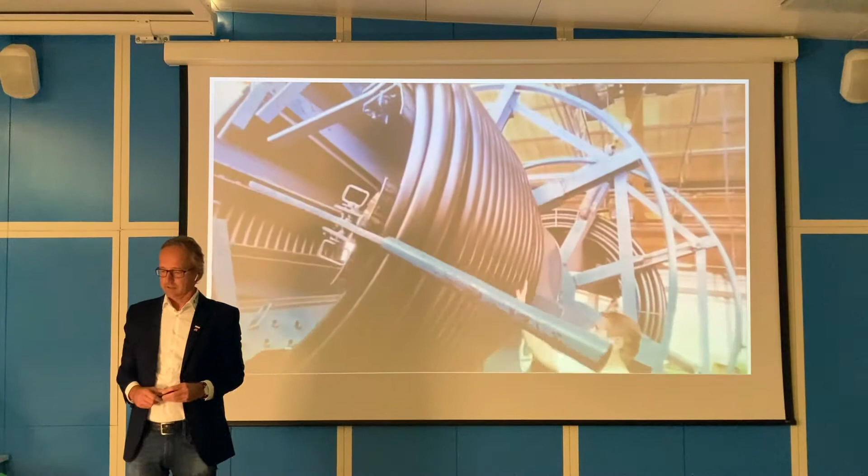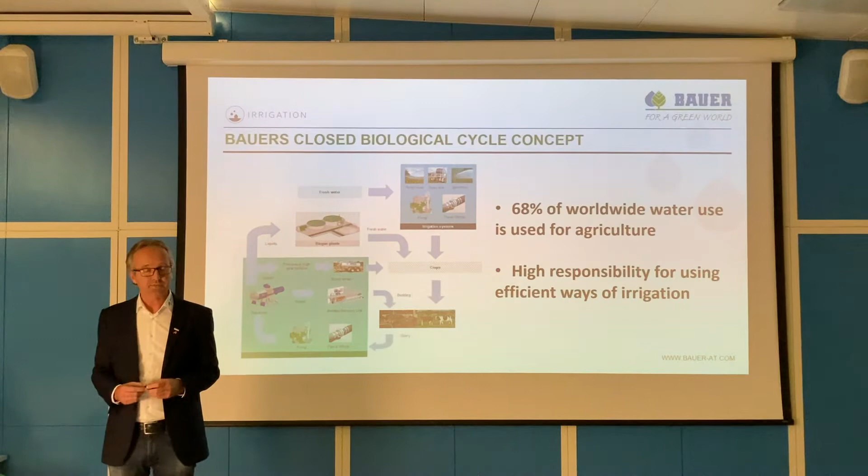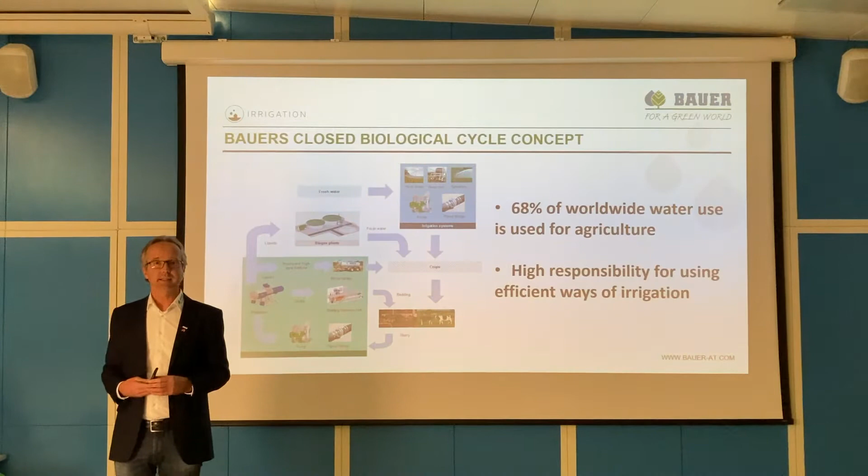Here you can see our closed biological cycle concept for BAUER. For us it's very important that all our products are as efficient as possible. The wastewater treatment equipment should handle the wastewater on livestock farms as well as industrial wastewater plants, and the irrigation equipment should reach highest irrigation efficiency and make sure the yield, in your case the corn, is perfect. You have a safety of your yield and you get perfect corn.

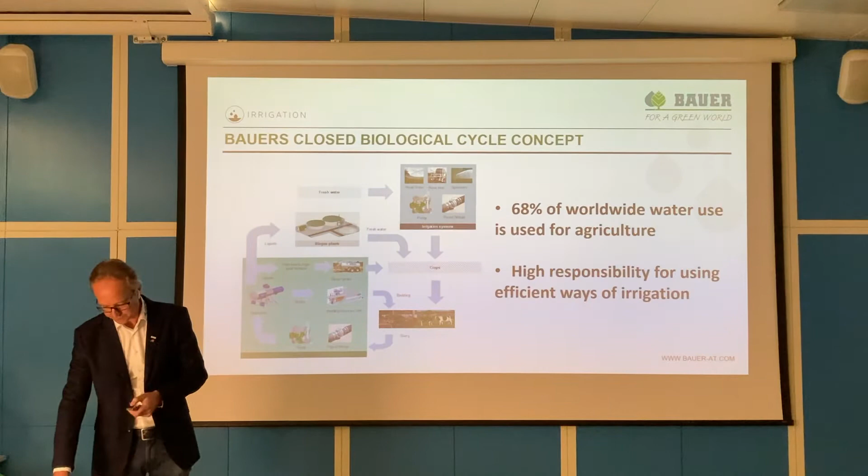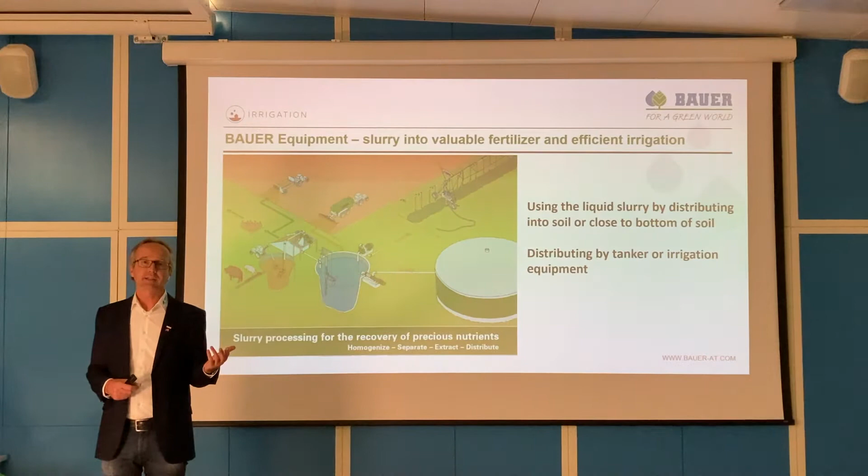In our wastewater treatment range, we have also a lot of products. We concentrate on separation, mixing and pumping technology. The separator divides the wastewater into a solid and a liquid part. The solid part can be used as an organic fertilizer or also as a bedding material. The liquid part can be distributed on the field, also on the cornfield, as a very valuable fertilizer.

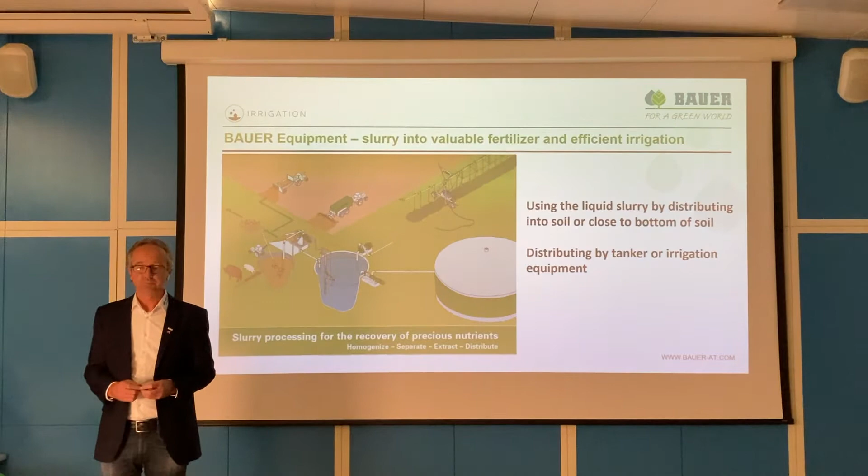We distribute the liquid of the slurry either with slurry tankers with very high technology distribution systems or also with irrigation equipment.

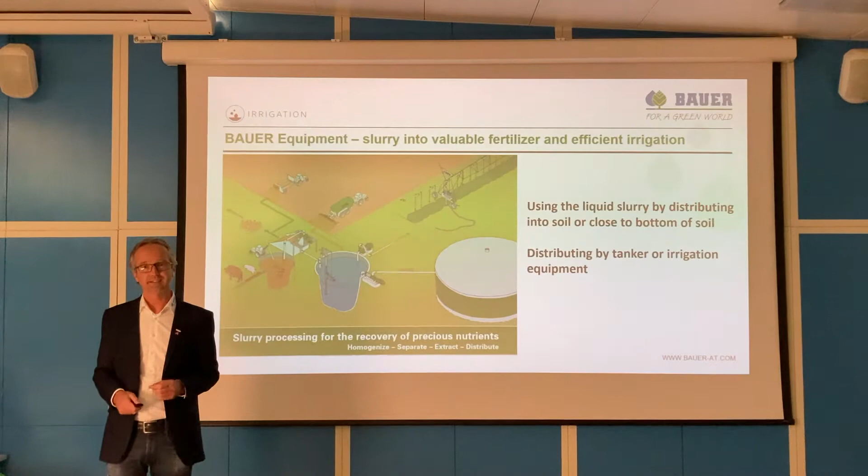The efficiency of different irrigation systems is a very important point, as the water which is available is getting less and less. At the same time we need to grow more crops, more vegetables in order to feed the higher growing population worldwide.

In the past and also until now, a lot of irrigation is done by flood irrigation. Flood irrigation is very inefficient. It has an efficiency of only 40–50%.

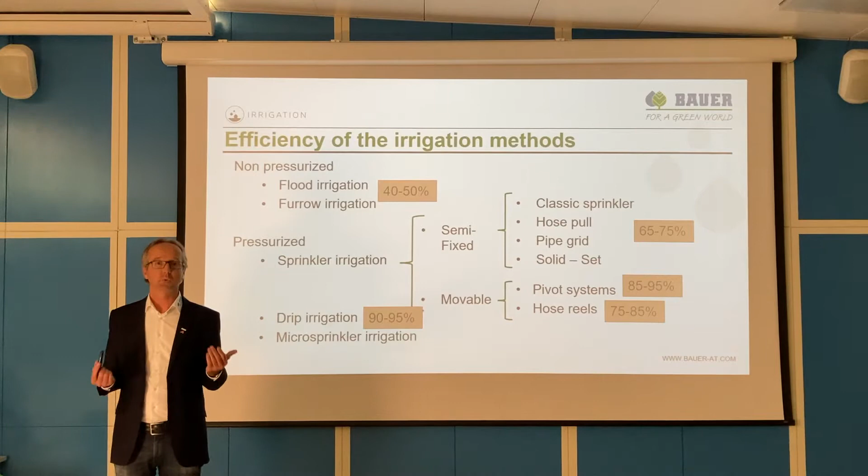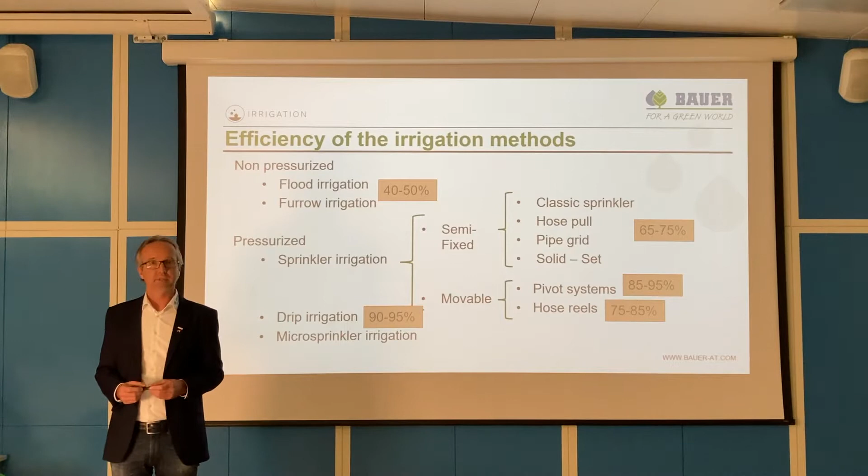From our company, the product range, we start with solid set sprinklers, with hose reel travelers, so-called RAINSTARs, and pivots or linear systems. Hose reel travelers can reach an efficiency of up to 85%, and pivot systems can reach an efficiency of 95%, which is very close to other highest efficient irrigation systems.

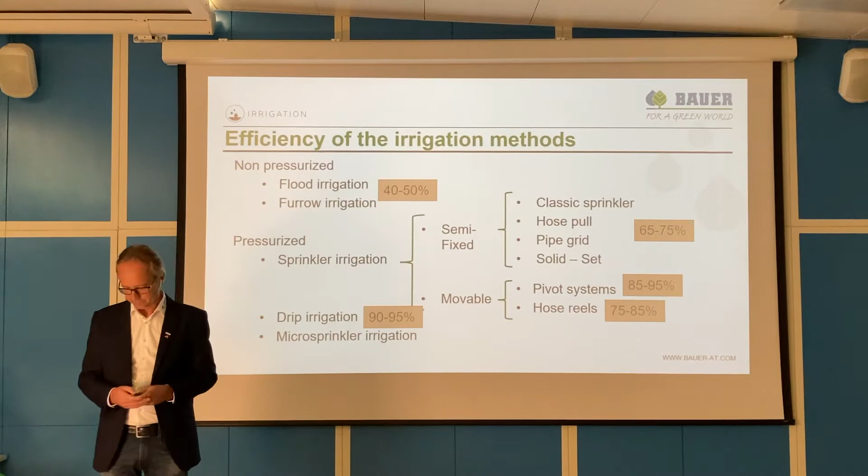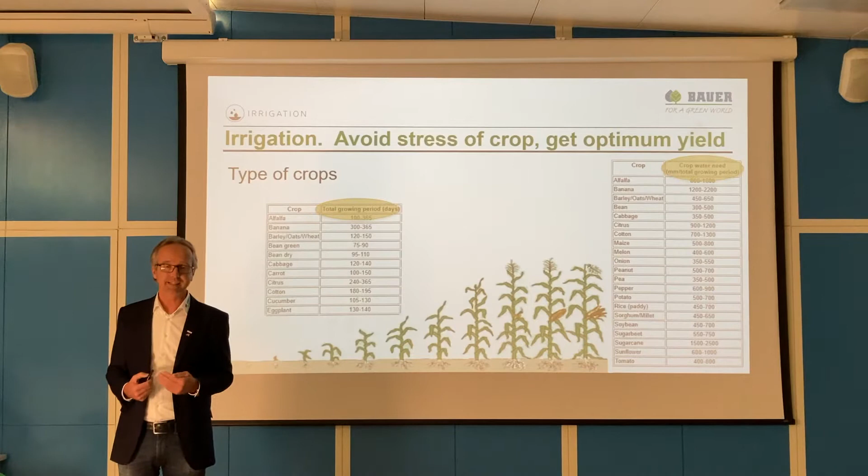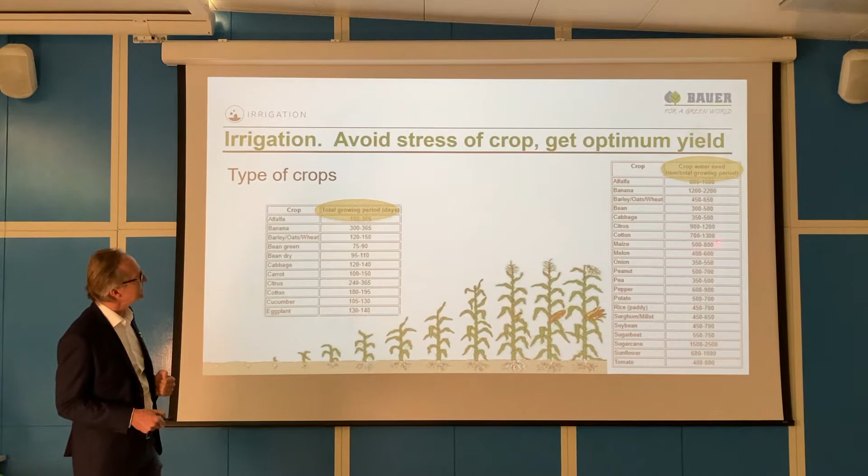For you as a crop grower, it's most important that the amount of water which the crop is needing from germination in the early growing stage until harvesting is always perfect. This only can be done with efficient irrigation systems. For corn, for example, the amount of water needed is 500–800 millimeter or liters per square meter in the whole growing period.

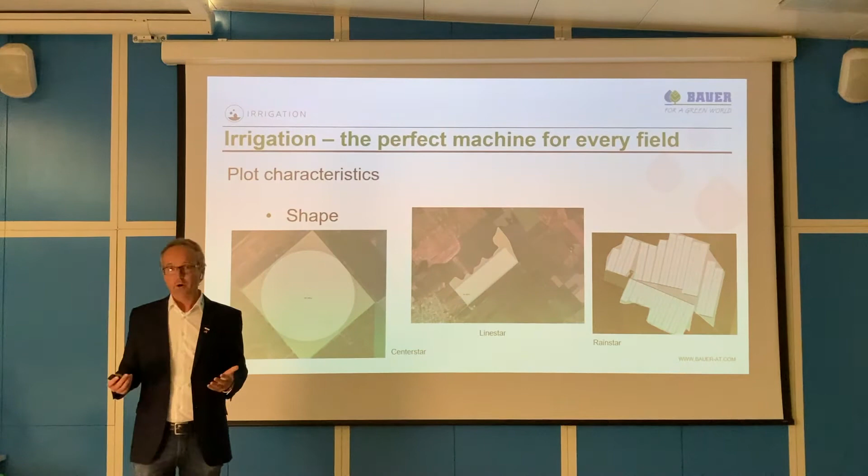Our irrigation equipment can match different sizes of fields and also different shapes of fields.

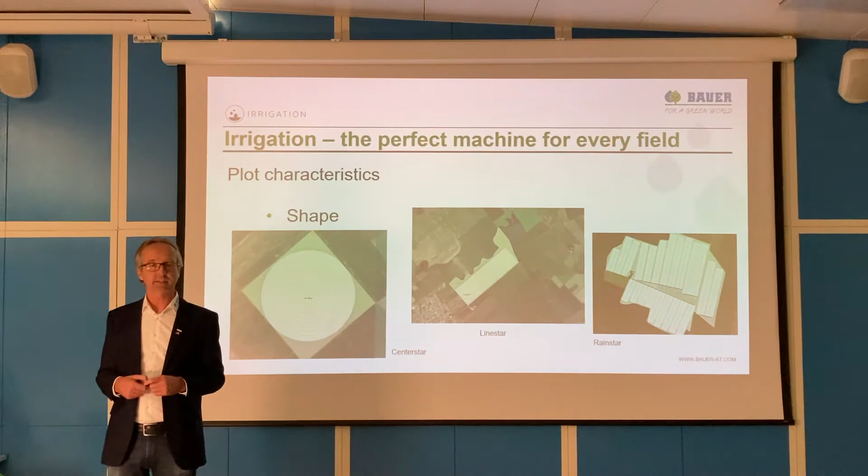In the left picture you can see a quadratic field. If the quadratic field is bigger than 15 hectares, a pivot would be the best choice for such kind of field. If the field is a rectangle field, a linear system is a very good choice. And for fields of 1, 2, up to 15 hectares and different shapes, the hose reel traveler, the RAINSTAR, would be the best choice.

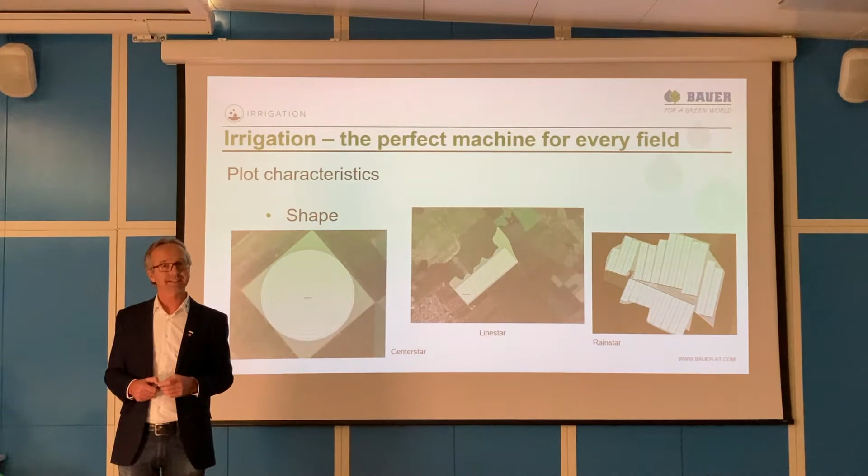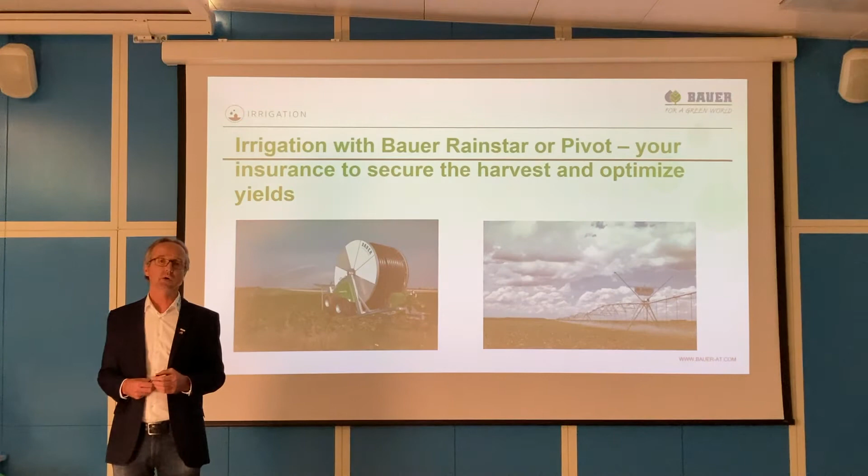On the left picture you can see a BAUER RAINSTAR irrigator. BAUER RAINSTAR irrigators are available in 3 sizes: BAUER RAINSTAR A2 or A3, then a T-series. T-series are available from 250 meter hose length up to around 400 meter hose length, or the very big machines, the RAINSTAR E-series, with hose lengths up to 700 meters.

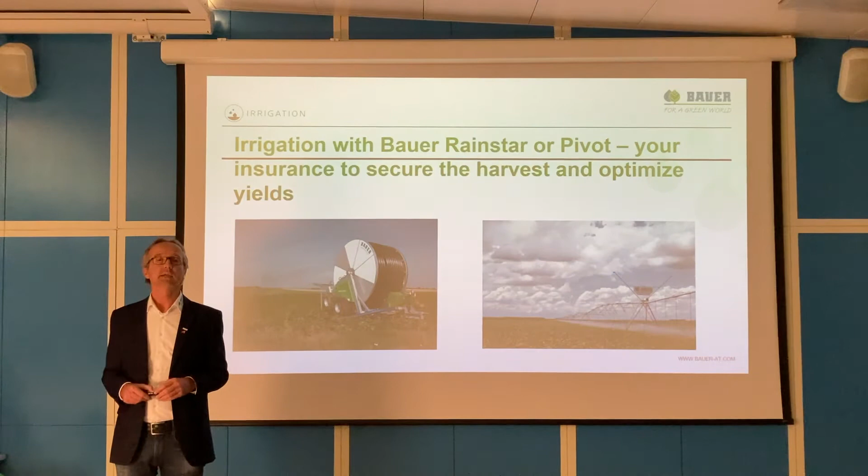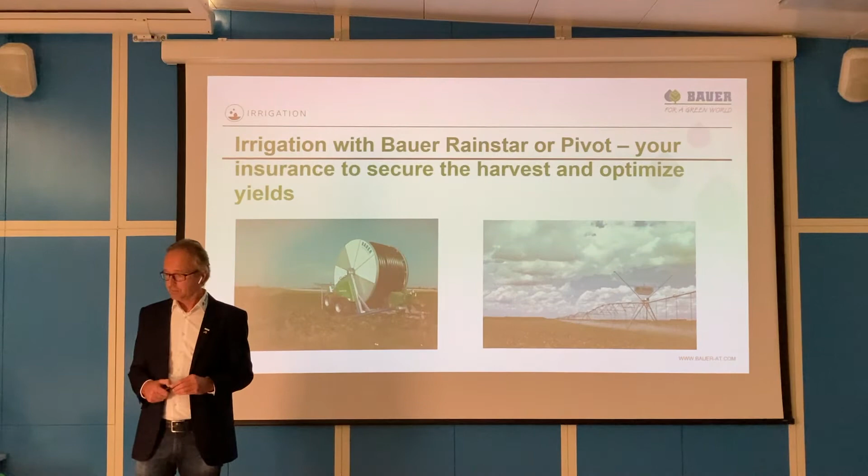On the right side you can see a BAUER pivot. BAUER pivots are worldwide in big use. BAUER pivots are used in around 80 countries all over the world, and BAUER pivots are irrigating all kinds of crops and also grassland. For example, in New Zealand, many dairy farmers are using the pivots for irrigating the grassland to feed the cows which are out on the grassland.

Now I would like to show you a video of the RAINSTAR and pivot, so you get an idea how the machines are installed and working on the field.

That's a very big BAUER pivot with a corner system, irrigating areas up to 400 hectares.

One machine can have up to 14 spans. This means a system length of around 600 meters.

The control of the machines is done with the so-called Smart Touch controller, with a 10-inch screen. The machine can also be equipped with VRI, which means variable rate irrigation, which I will explain a little bit later.

A corner arm has the advantage that the corners of the rectangle field can also be irrigated with a pivot. Here the corner arm is in operation, in use.

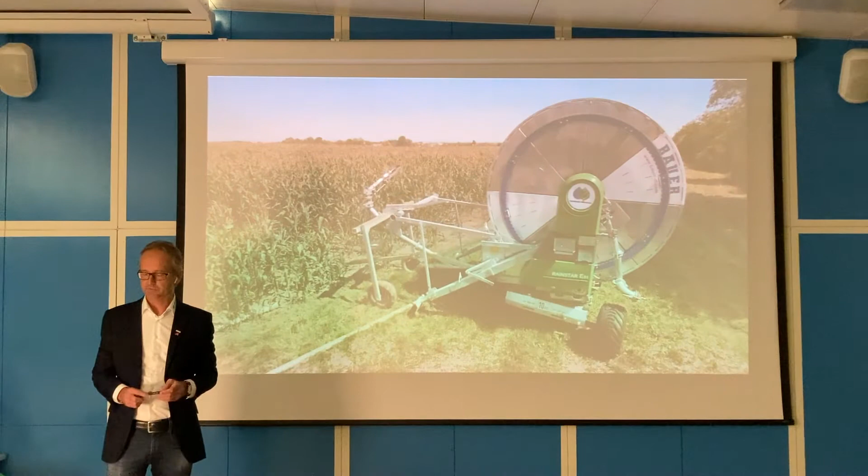On the center tower you have the control unit for running the machine. Now we're already at the BAUER RAINSTAR, in that case a bigger size with an irrigation gun.

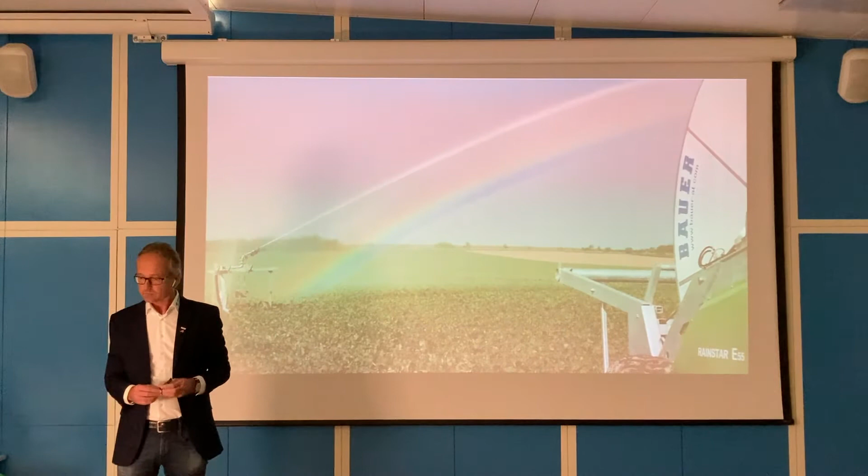The irrigation gun can reach an irrigation strip of up to 100 meters. The PE pipe will be pulled back only with the pressure of the water, and in around 8 to 12 hours one irrigation strip will be finished.

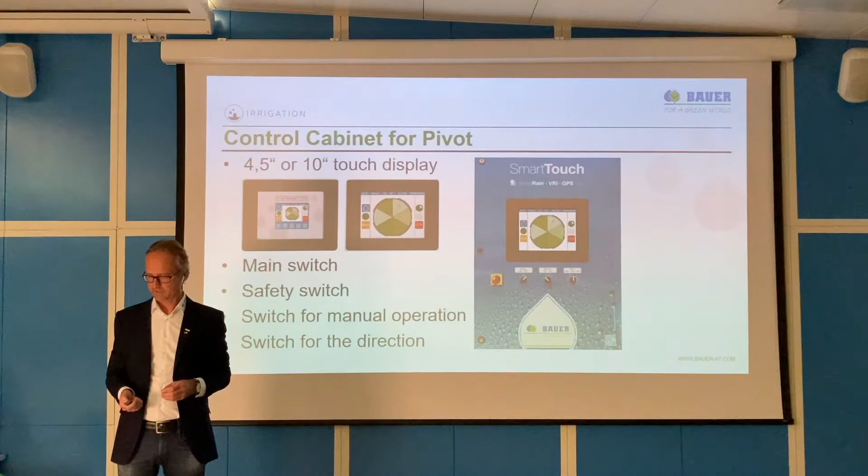That's the Smart Touch control system for the pivot. The BAUER Smart Touch controller is available in 4.5 or 10-inch screen size, very easy to use. You can put in a SIM card and connect to our SmartRain.

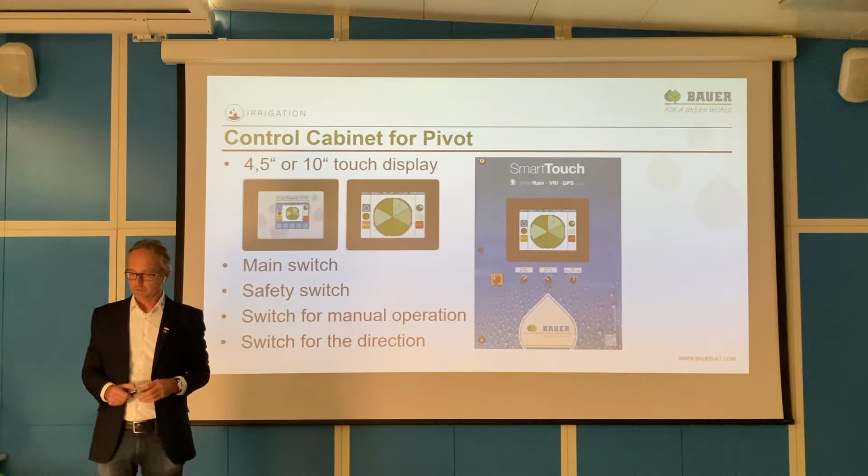SmartRain is an application where you can control, start, and run the irrigation equipment remotely.

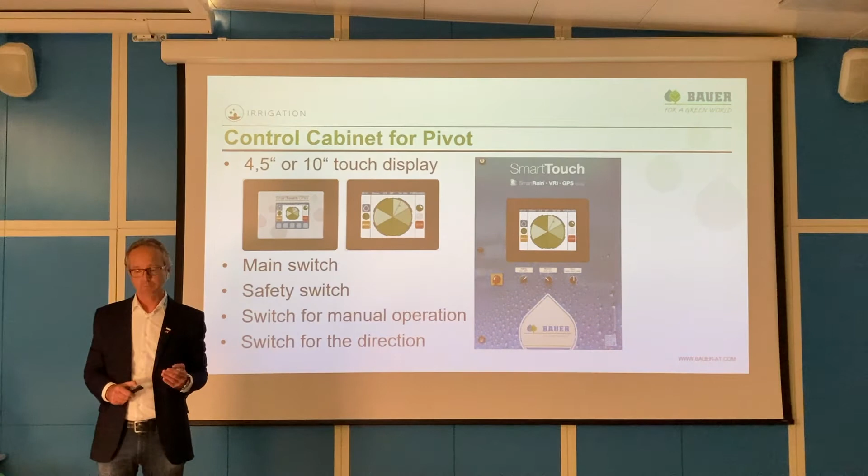BAUER VRI is also part of our smart farming development. With BAUER VRI you are able to irrigate each plot of the field with exactly the amount of water which is needed there. If you have a field, for example, with different growing stages of your corn or even different crops, you can easily set the irrigation amount on each plot, which makes the water efficiency very good. You can also choose some areas not to irrigate, which even increases the water efficiency.

BAUER SmartRain is very popular. We have the SmartRain licenses out all over the world for both hose reel travelers and pivot machinery.

The BAUER SmartRain app allows you to control the machine remotely. It's also easy to get reports on how much water was used in the past months or the past year, so you can report to the authority.

Another advantage is that you can do very good team management. From the head office you can overlook your different teams who are running the RainStars, and see how fast the teams are changing from one field to the next, or from one irrigation strip to the next.

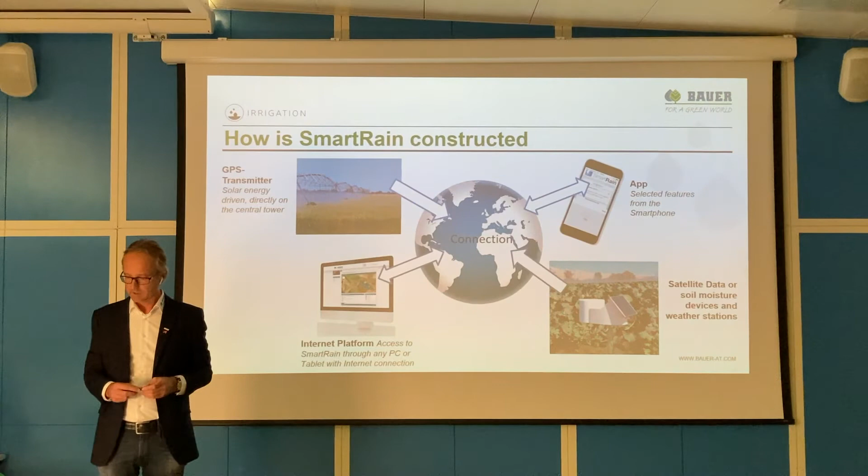Also, data from weather stations can be sent to the SmartRain, and then the user, or you from the head office, can set the amount of water which should be irrigated based on the latest weather data.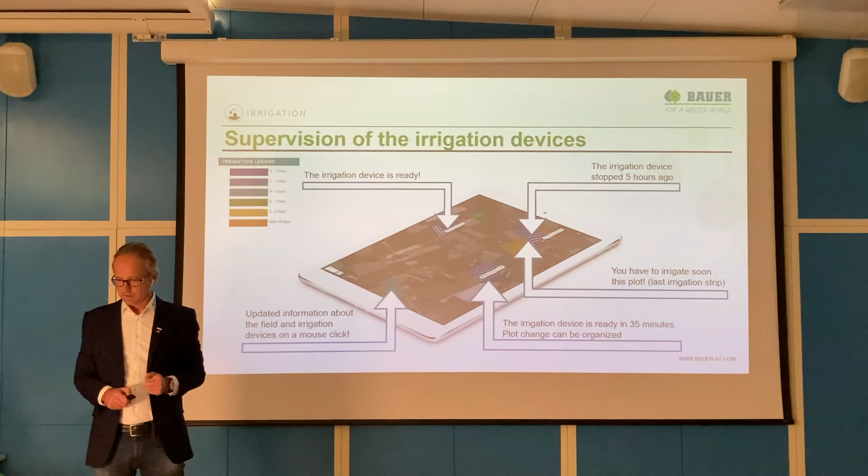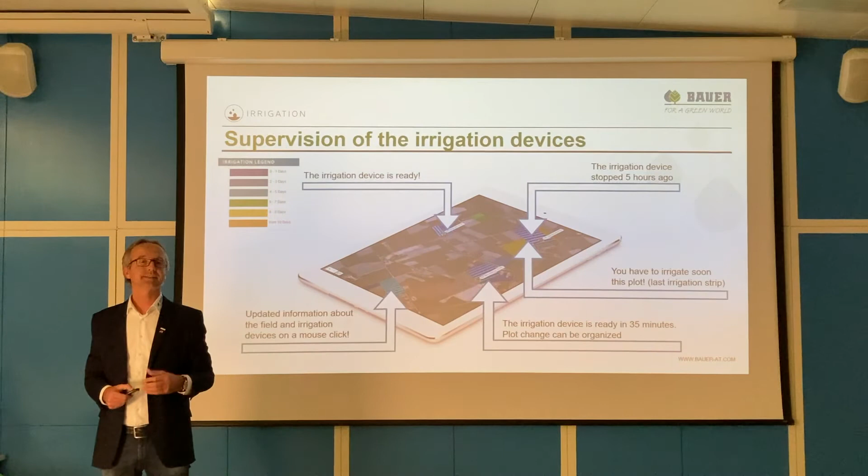Here again is an overview of such a Smart Rain system for one customer. The customer gets information that the irrigation device is, for example, ready to use, or gets information that this field has not been irrigated in the past 3 days.

This allows you to make your irrigation very efficient and finally get a perfect crop at the end of the growing season.

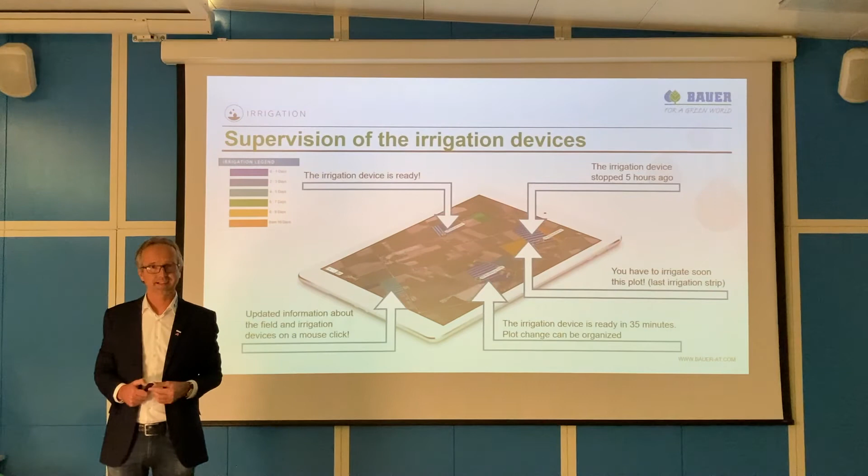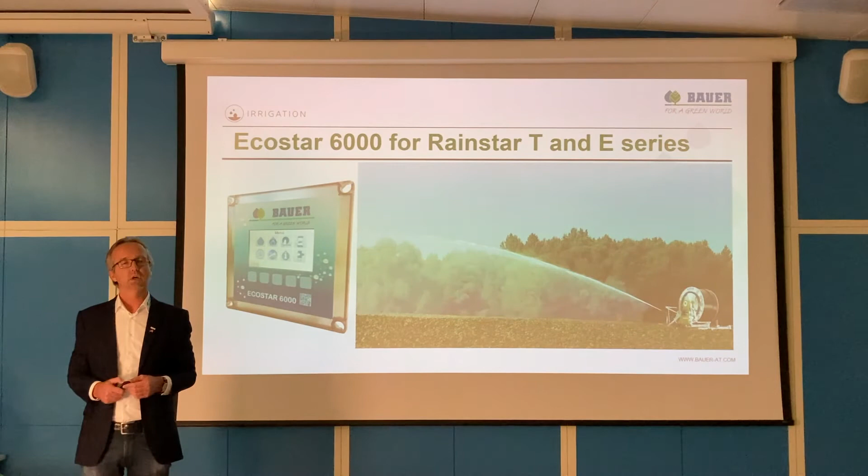The EcoStar 6000 is the irrigation computer which is used on the BAUER hose reel machinery, on the T series and the E series, and it can also be connected with Smart Rain.

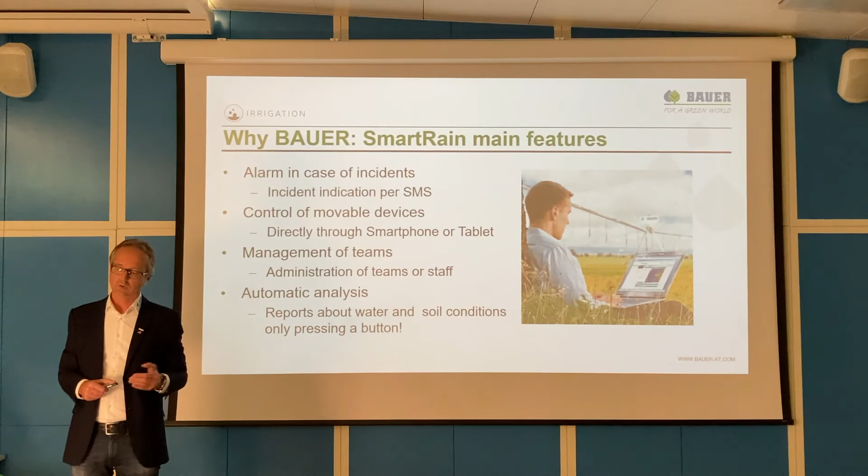The Smart Rain is a software license. There is initially a license to pay, and then a yearly license fee. The features are very modern features for hose reel travelers, for pivots, linear systems, and also center liners.

Summing up, I hope I gave you a very good overview of BAUER Group and our irrigation equipment. Our machineries, the RainStar and the pivots, are working very reliably. The first BAUER RainStar, for example, was sold in the 1970s and is still running now.

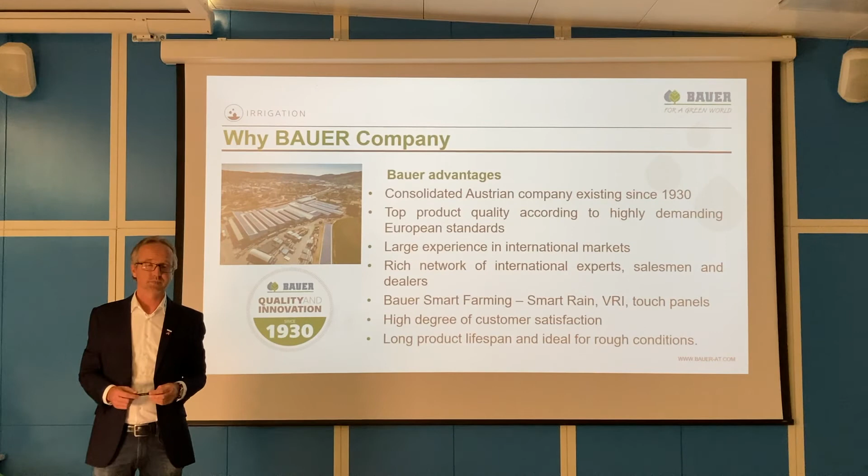Almost 50 years earlier, BAUER company was founded in 1930. This year we are celebrating our 90 years anniversary. We are exporting our products to more than 100 countries worldwide.

Also in the Philippines we already have a lot of customers for both irrigation equipment and wastewater treatment machinery. Our separators are running on pig farms and dairy farms, and the RainStar hose reel irrigators are running for irrigating sugarcane, for example, and also for irrigating corn in Isabela.